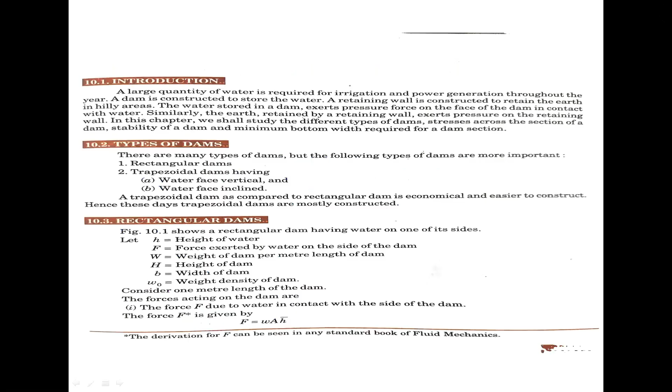I will explain example problems for the stability of dam. Remaining two example problems are there. Now I will explain the example problems: problem 10.13, and the next problem, 10.12.

Now these are the example problems for stability of dam. I have to calculate them. I will explain problem 10.12 and 10.13.

Now we have to write the given data first. For any problem, I have to read it for two times, write the given data, and calculate the problems. These example problems are on stability of dams.

How to calculate? See problem 10.12. I will explain the problem.

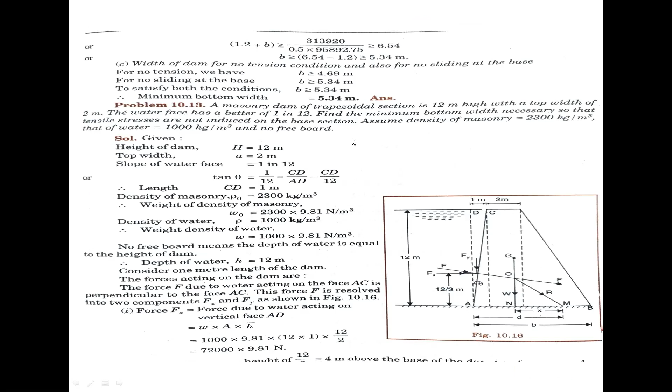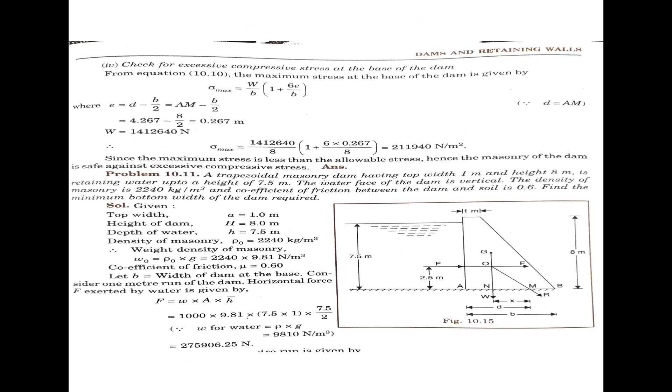This type of problem is very, very important. You have to calculate the values for force and calculate the base width, and you have to calculate the overturning and sliding and tension stresses, compression stresses. Have to take into account water density and weight of the masonry, and calculate the horizontal force.

You have to calculate - now see the diagram, write the diagram and divide it into a number of parts, and give names to each. Now take the center of gravity as capital G.

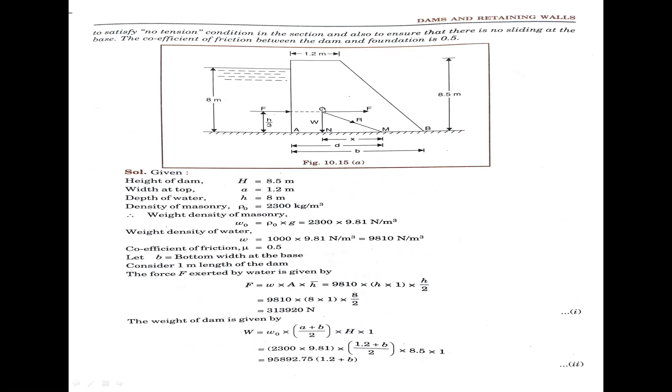This example problem you have to practice a number of times, then it is easy to calculate these problems. Now go to next topic, retaining walls.

Retaining walls are very very important. A retaining wall is a wall used for retaining the soil or earth.

The earth retained by a retaining wall exerts pressure on the retaining wall in the same way as water exerts pressure on a dam. A number of theories have been evolved to determine

the pressure exerted by the soil or earth on the retaining wall. One of the theories is Rankine's theory of earth pressure. Before discussing Rankine's theory, let us define the angle of repose and study the equilibrium of a body on an inclined plane. The angle of repose is defined as the maximum inclination of a plane at which a body remains in

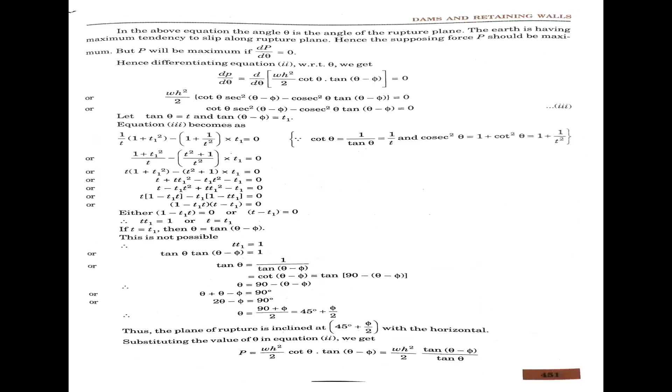Now we have to calculate Rankine's theory, very important for retaining walls. We have to derive the equation and calculate the retaining wall example problems. Now see the forces acting on the body.

We have to take the first case for equilibrium of a body on an inclined plane. Retaining walls — already explained examples using this retaining wall in dam sections, construction of dams, roadworks, railways — also used for retaining walls, very important for irrigation structures.

Now I have to divide into two cases. First case: the body may be on the point of moving down the plane. Another case: the body may be on the point of moving up the plane. Now, the first condition, first case — the body is on the point of moving down the plane.

In the first case, let capital W be the weight of the body, and capital P the horizontal force applied on the body in order to prevent the body from moving down the plane. Theta equals the angle of inclination of the plane, and phi equals the angle of limiting friction, which is the angle made by the resultant of normal reaction and limiting force of friction.

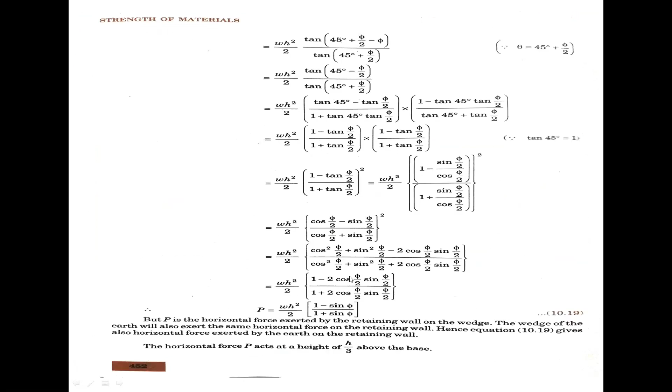For retaining walls, we have to use Rankine's theory of pressure. This is very very important. I have the derivation part. Last class I will explain this derivation part and example problem for retaining wall.

Very very important. See this condition, write the diagram, see the diagram, and follow the conditions and Lami's theorem, you have to apply Lami's theorem. Finally, downward and upward condition, two cases for retaining wall, for inclined plane, equilibrium of body on inclined plane, you have to take in, for example, derivation parts, first case and second case.

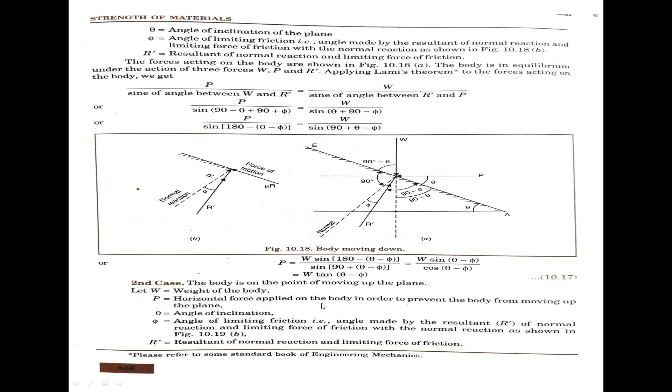Right now this is the second case of upward. Have to take in both decisions. Right now, the P value I have to calculate. P means the horizontal force applied to the body in order to prevent the body from moving up or down the plane. That P value I have to calculate through this process, using Lami's theorem to calculate the P value.

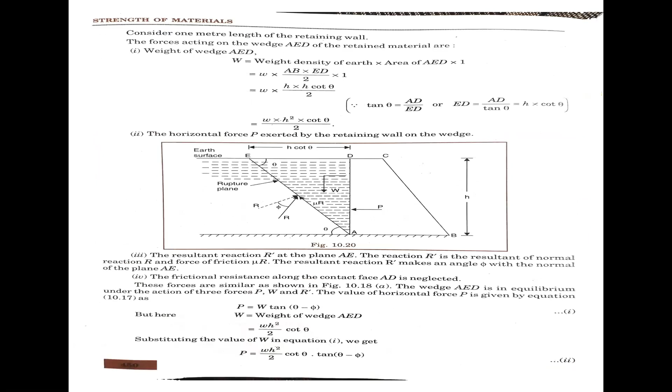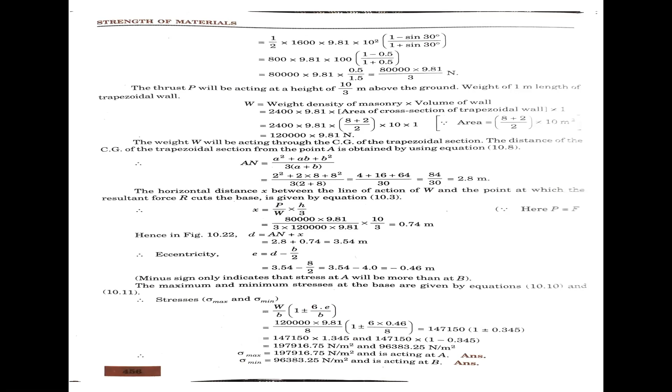Next topic, Rankine's theory of pressure. Now this derivation part I will explain, following the equation and calculating example problems. Retaining walls, you have to calculate the pressure and the water pressure also, to resist the earth and soil pressures.

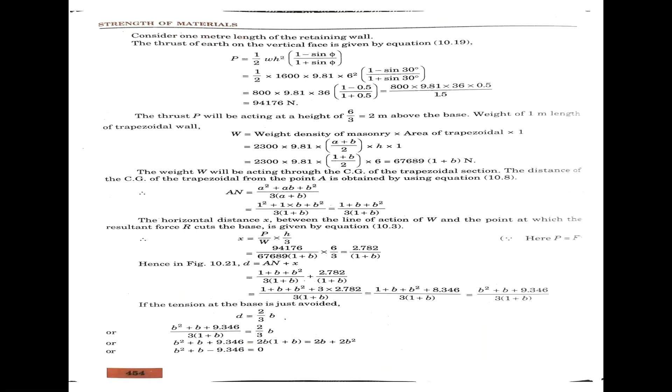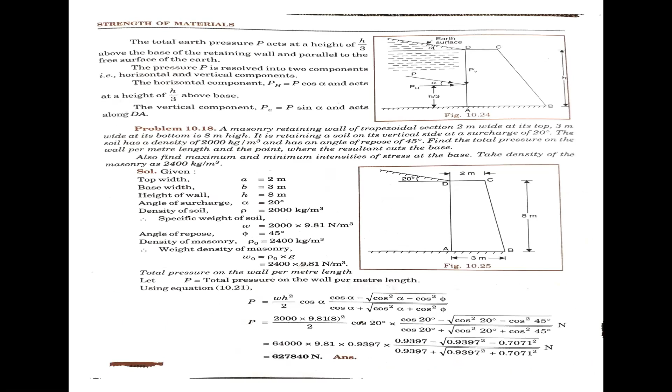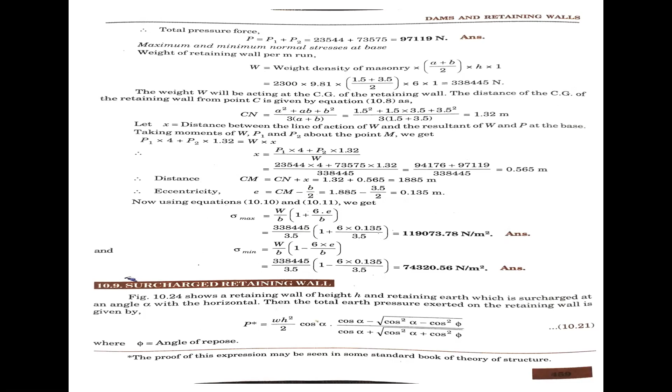Trapezoidal section I have to take it. In these retaining walls, trapezoidal shape is taken, and another one is surcharge retaining walls. Now, small formulas are there, you have to use and calculate surcharged retaining walls, and go to chimneys.

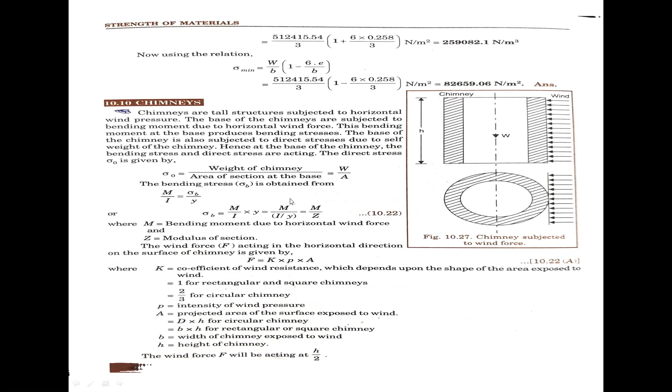That is a cylindrical shape, chimneys used for various industries. Now the chimney, to calculate the moment, I have to calculate bending moment, section modulus of section, moment of inertia, coefficient of wind resistance, intensity of wind pressure. We have to calculate the chimney height to design, and calculate the moment conditions for chimneys, derivation part and explain example problems.

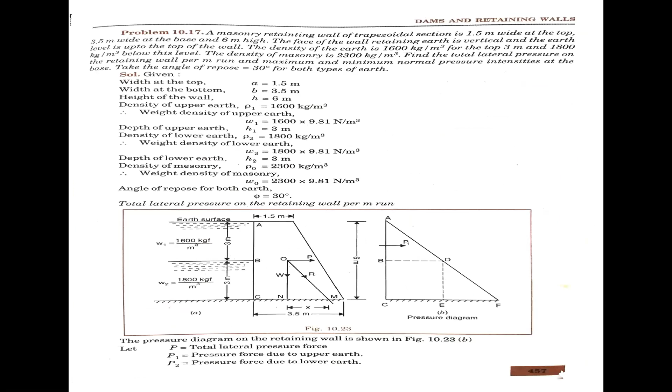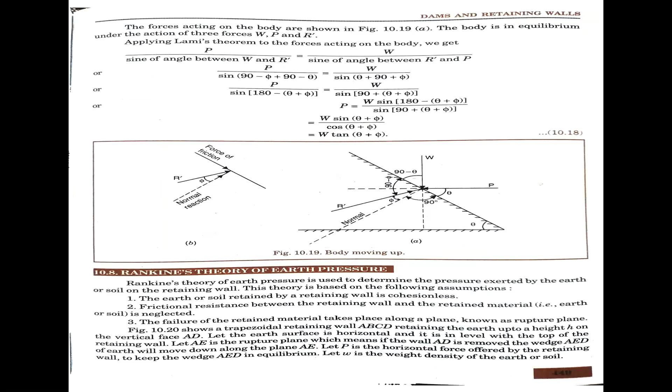This chapter is completed. Next class I will explain the retaining wall derivation part for Rankine's theory and example problems. Next class I will explain, and this is the two cases, down and up, for equilibrium of body on inclined plane. Thank you for this opportunity.